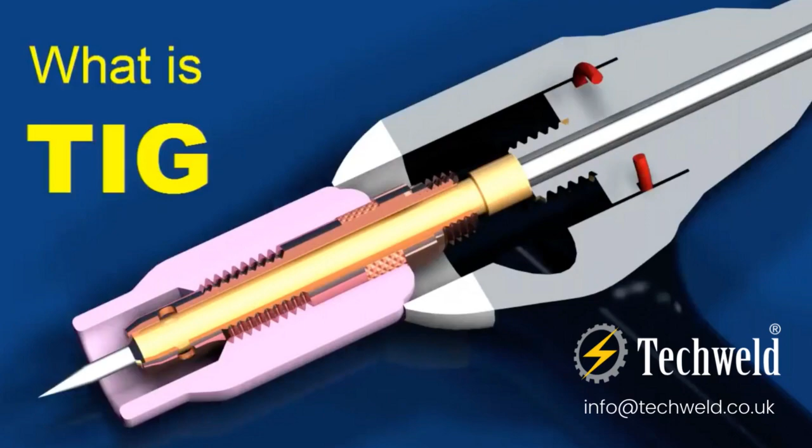What is TIG welding? TIG stands for tungsten inert gas welding. The American Welding Society calls this process gas tungsten arc welding, or GTAW. You might also hear it called heli-arc welding.

TIG welding uses a tungsten electrode, and tungsten has an extremely high melting point. When you TIG weld, the electrode gets hot, but it doesn't melt. We say that it's a non-consumable electrode. That doesn't mean it lasts forever, it just means that it doesn't melt and become part of the weld. In a lot of other welding processes, the electrode melts and becomes filler metal. Those are consumable electrode processes.

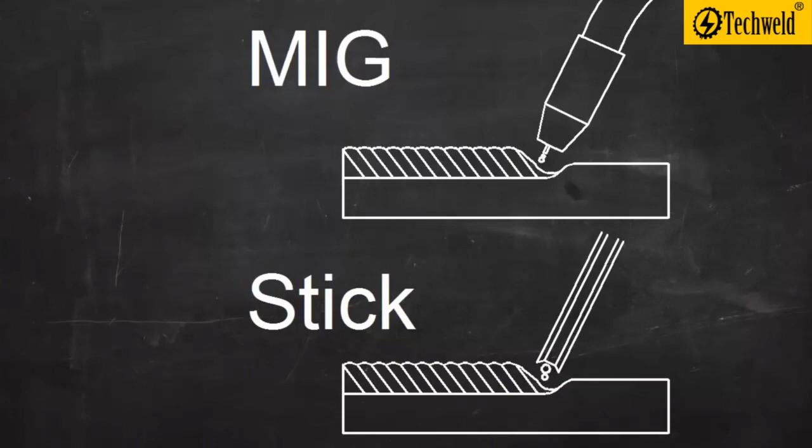Here's the tungsten electrode being held in a TIG torch. The electrode slips into a collet, and the collet tightens up against the collet body. You can adjust the length that the electrode sticks out of the holder by loosening up the end cap. When you tighten the end cap, the collet clamps down on the electrode.

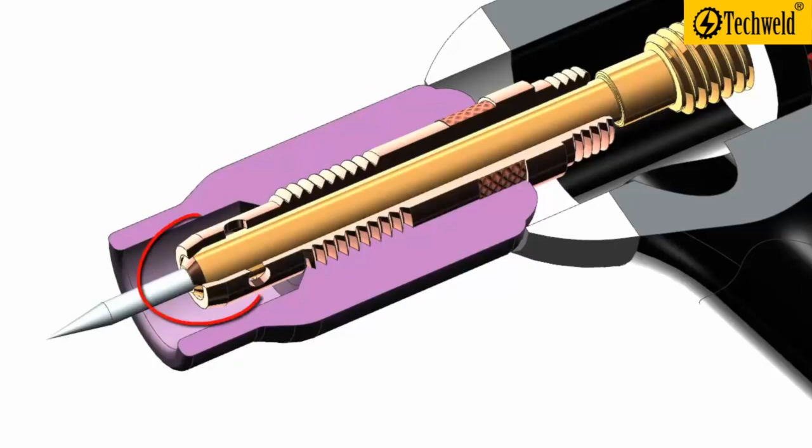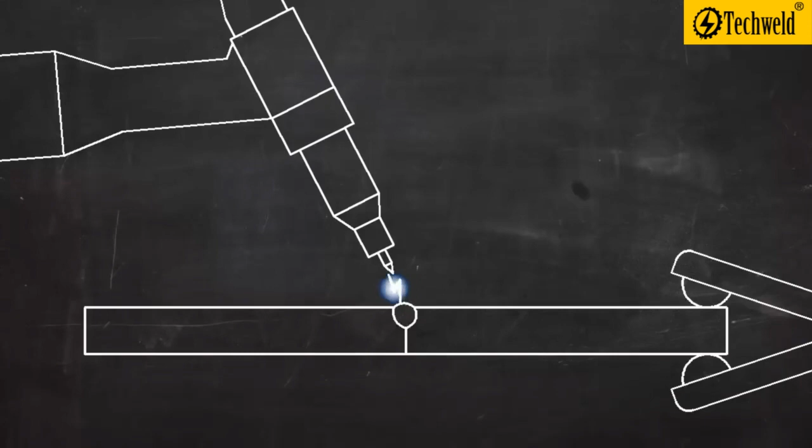TIG works by melting the base metal, which is the metal that makes up the two pieces to be joined. The heat is generated by an electric arc that forms between the base metal and the tungsten electrode. You can control the amount of heat with a foot pedal or with a thumb wheel on the torch.

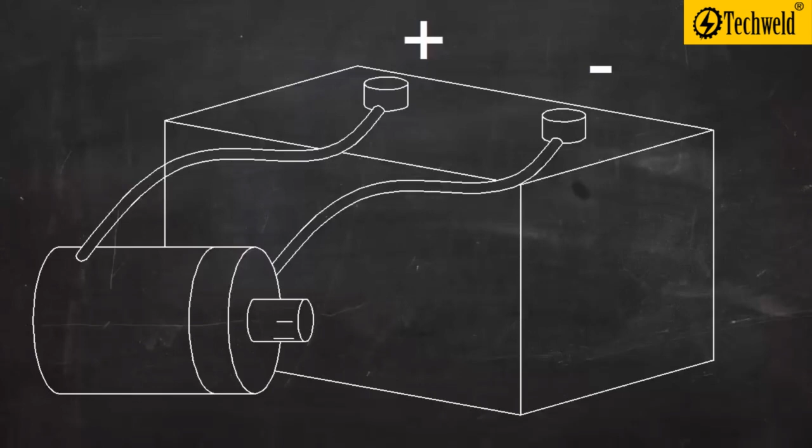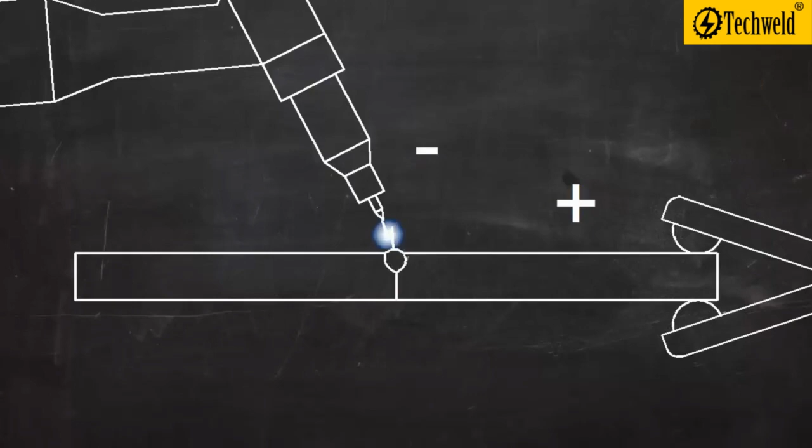For most metals, the current is direct current, or DC. DC is like the current flowing from a car battery. One wire is always negative and one is always positive. In DC TIG welding, the electrode is usually negative and the workpiece is positive. The term DCEN is used for this, indicating that the current is DC and the electrode is negative. This is also called straight polarity, but DCEN is a more descriptive term. DCEN puts most of the heat on the workpiece, and it's the most common setup.

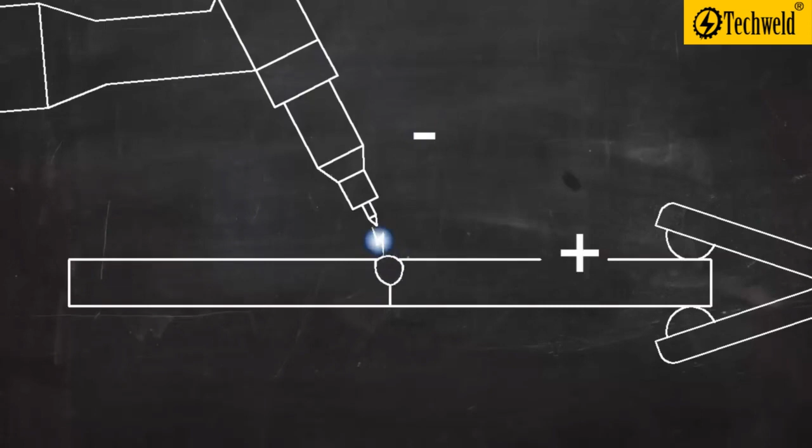When welding aluminum, however, AC is used. In AC, the positive and negative voltages switch back and forth between the electrode and the workpiece. This puts more heat on the electrode, but it has a cleaning effect on the workpiece. Aluminum forms oxides that float to the top of the weld pool and prevent a good weld. AC current helps control these oxides.

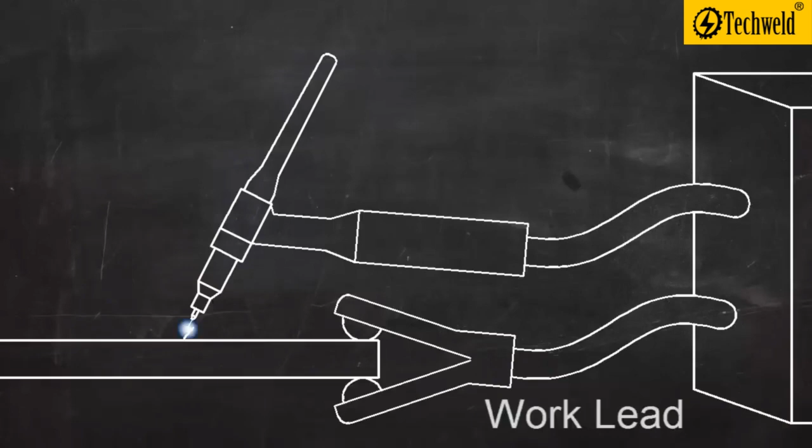In an electric circuit, the current flows in a loop. In TIG welding, the current has to flow in a complete circle from the machine to the torch, into the work, and back to the machine. A work lead is clamped to the work to complete the circuit from the workpiece back to the machine.

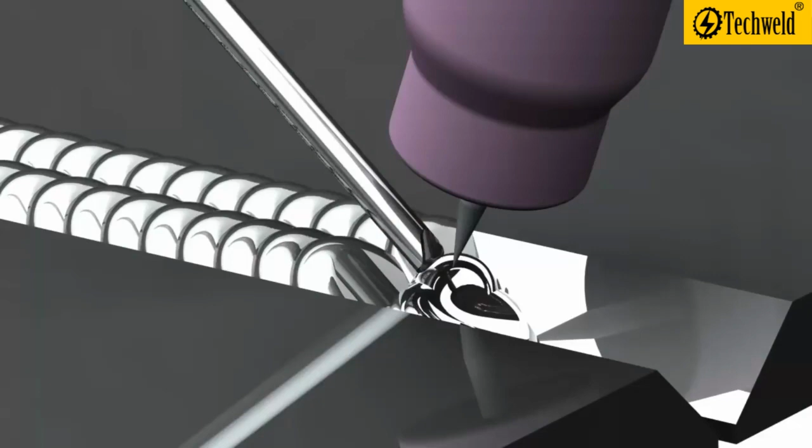You can TIG weld with or without filler metal, and that's not a choice you have in a lot of other processes. If you want to add filler metal to a TIG weld, use a filler rod, which is just a rod of metal with a specific alloy. You want to make sure that the filler metal you're using is compatible with the base metal and that it has the strength required to do the job.

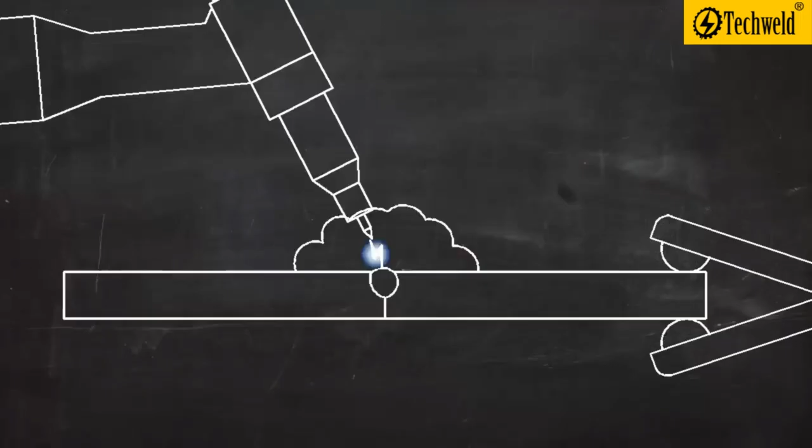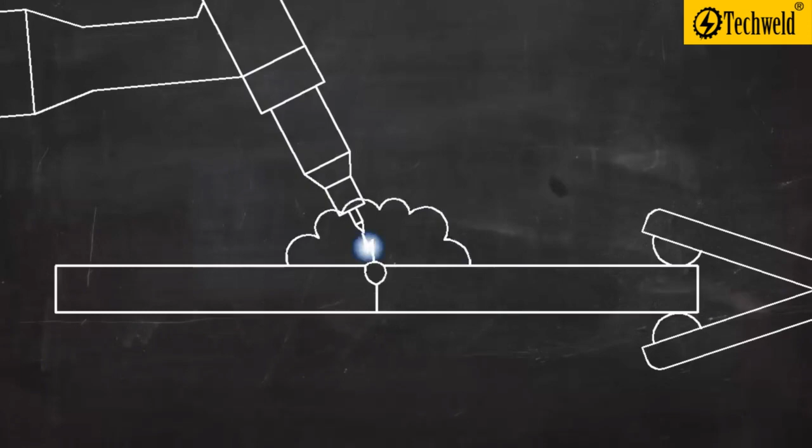So in summary, TIG welding is an electric arc welding process, uses a non-consumable tungsten electrode, the filler metal is added separately in the form of filler rod, and the shielding gas comes from a high-pressure cylinder.